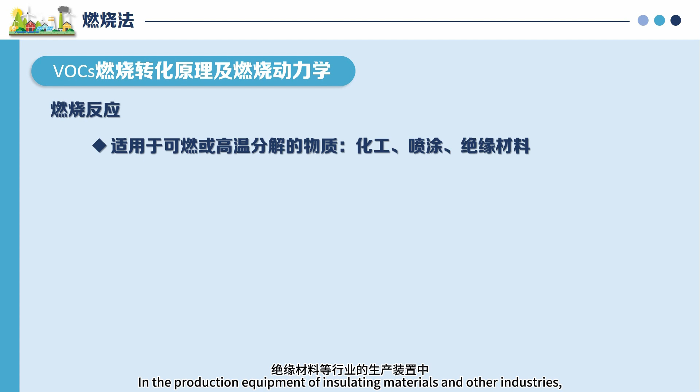Organic waste gas discharged from these processes. Combustion purification is widely used. It can be used to eliminate stench, and while unable to recover useful substances, the heat can be recovered.

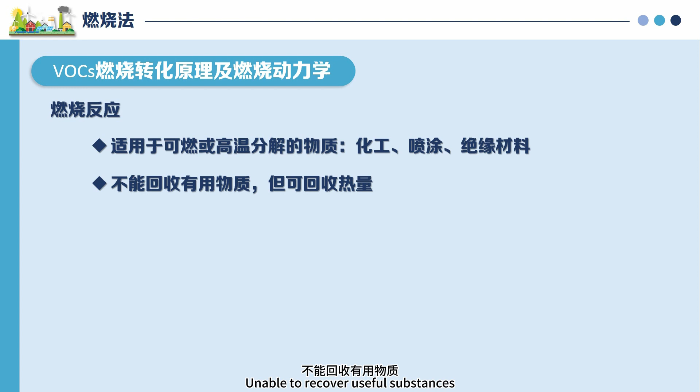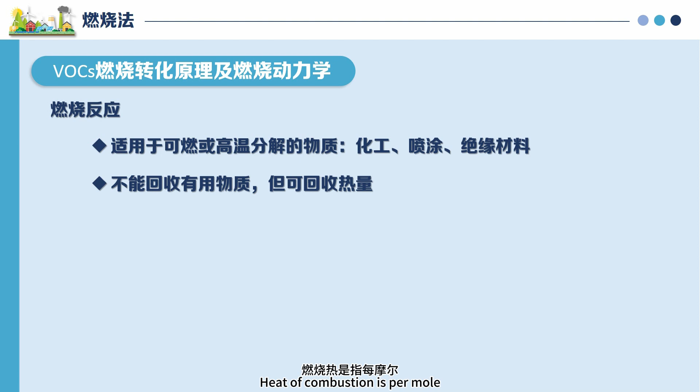First, VOC combustion conversion principle and combustion kinetics. Let's look at the combustion reaction together. As shown below, heat of combustion is the heat released per mole when fuel is burned, in kilojoules per mole. The combustion chemical reaction equation is used to carry out material balance and heat balance calculations, and serves as the basis for designing combustion devices.

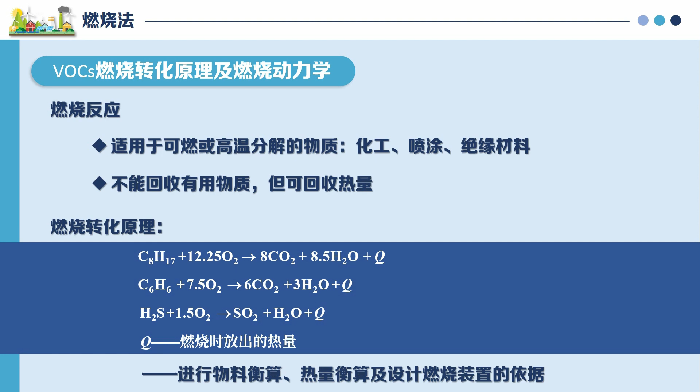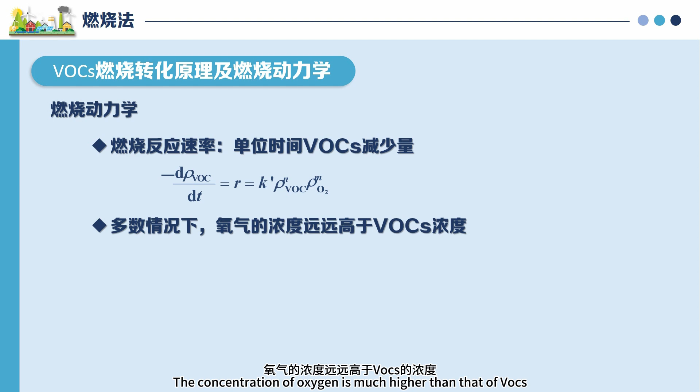Second, combustion dynamics: the reaction rate and unit time concentration reduction of VOC combustion can be expressed as the following formula. In most cases, the concentration of oxygen is much higher than that of VOC. It can be expressed as the following formula.

For most chemical reactions, the kinetic rate relationship between constant K and temperature T is expressed by the Arrhenius equation.

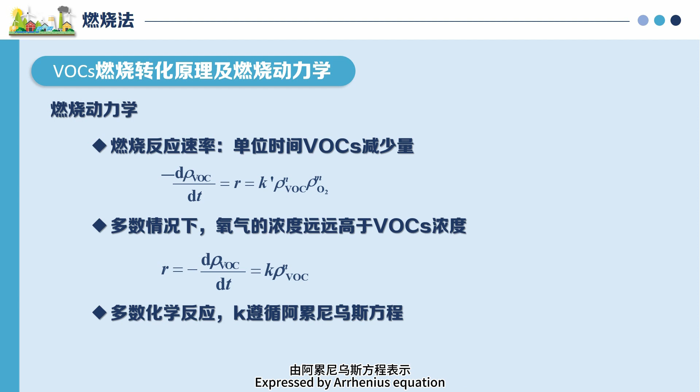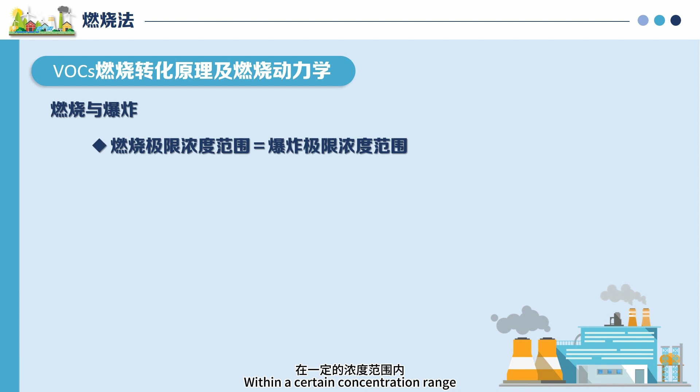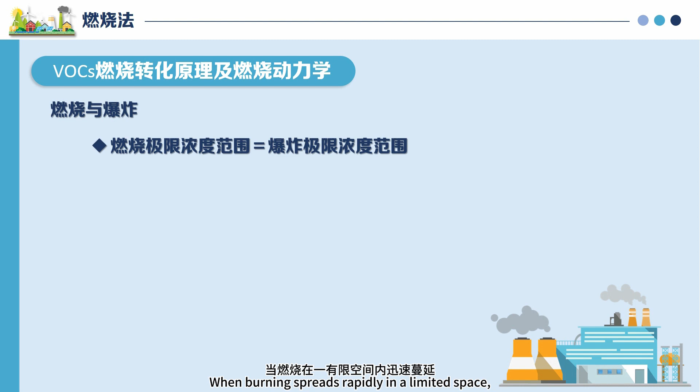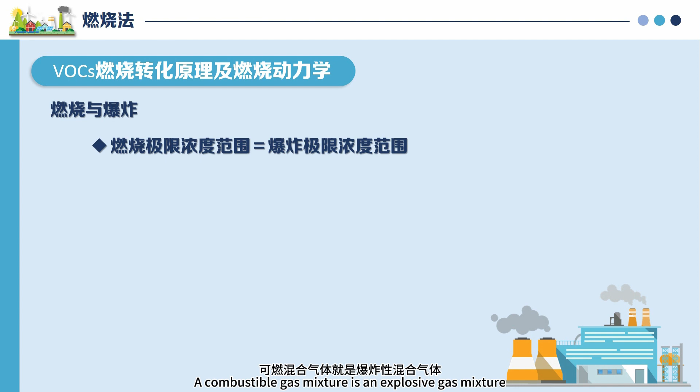First is combustion and explosion. When the oxygen and combustible components contained in the mixed gas are within a certain concentration range, when a point is on fire, heat generated can continue to ignite the surrounding mixed gas. This concentration range is the combustion limit concentration range. When burning spreads rapidly in a limited space, an explosion is formed. So for the mixture, in terms of volume composition concentration, a combustible gas mixture is an explosive gas mixture within the range of combustion limit concentration.

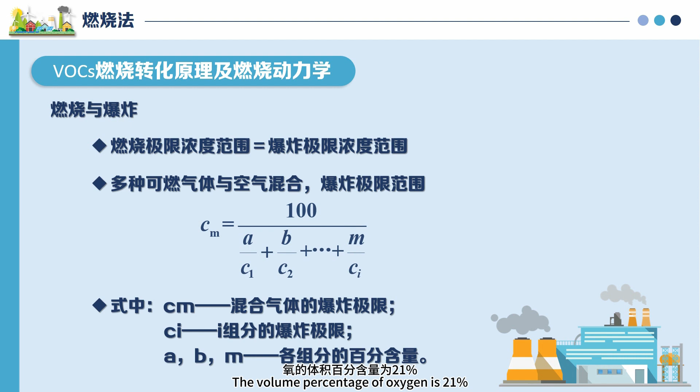That is the explosive limit concentration range. For air, the volume percentage of oxygen is 21%. Therefore, as long as the concentration of combustible components in the air is determined, the limit range has two values: upper limit and lower limit.

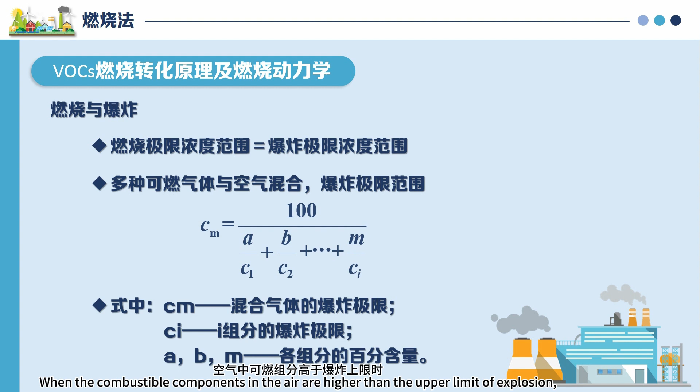When the combustible components in the air are lower than the lower limit, heat generated by combustion is not enough to ignite the ambient mixed gas. Therefore, it can't continue to burn, and won't cause an explosion. When the combustible components in the air are higher than the upper limit of explosion, due to lack of oxygen, it can't cause an explosion.

When a variety of combustibles are mixed with air, the explosion limit range is approximately obtained from the following formula.

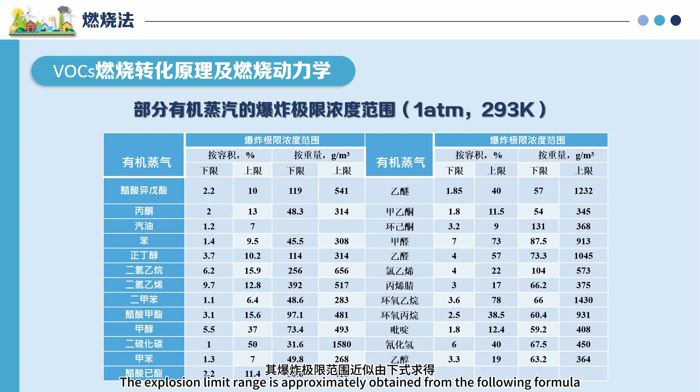Second, combustion process. First, direct combustion, also known as direct flame combustion. It uses combustible and harmful components in the exhaust gas as fuel directly.

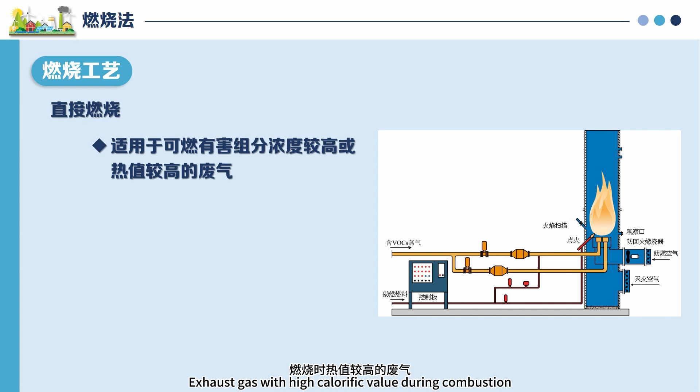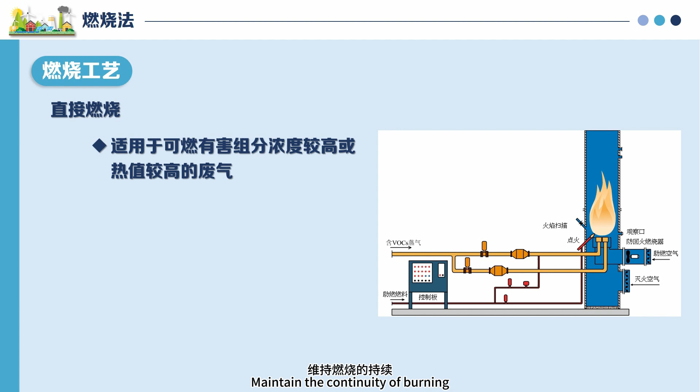Therefore, this method is only suitable for purifying flammable, harmful component exhaust gas with higher concentration, or for purifying harmful components in exhaust gas with high calorific value during combustion, because only the heat released when burning exceeds the heat dissipated into the environment can the temperature of the combustion zone be maintained, sustaining continuity of burning. When multiple combustible gases or a plurality of solvent vapors are mixed in the exhaust gas, as long as the concentration value is suitable, it can also be burned directly.

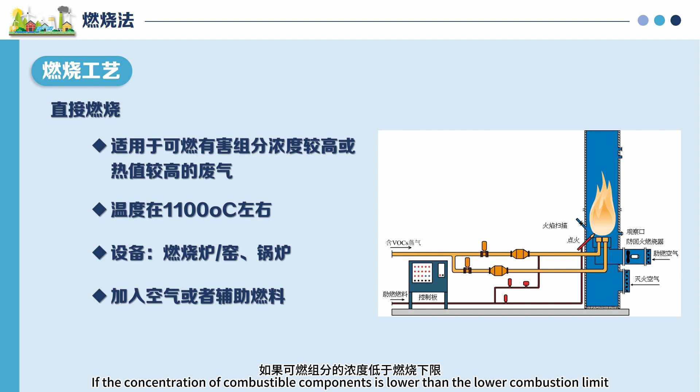If the concentration of combustible components is higher than the upper limit of combustion, it can be mixed with air and burned. If the concentration of combustible components is lower than the lower combustion limit, a certain amount of auxiliary fuel can be added to maintain combustion, such as natural gas.

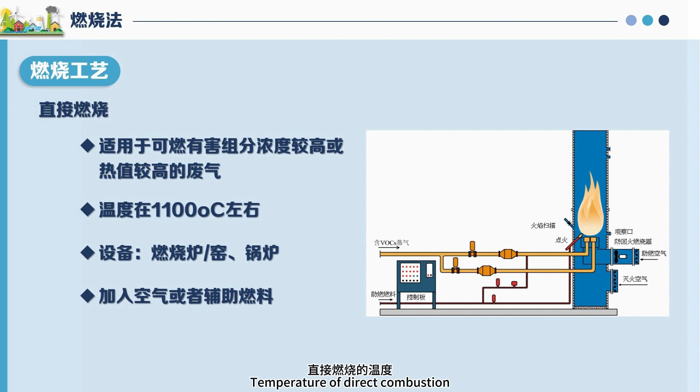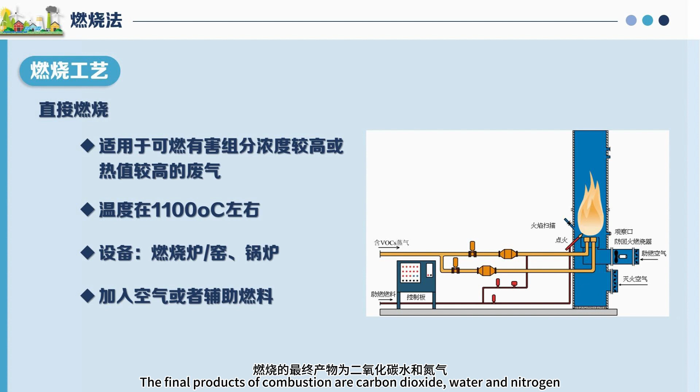Direct combustion equipment includes general combustion furnaces, or the exhaust gas is introduced into the boiler through some device and burned as a fuel. The temperature of direct combustion usually needs to be around 1100 degrees Celsius. The final products of combustion are carbon dioxide, water and nitrogen. Direct combustion method is not suitable for treating low concentration waste gas.

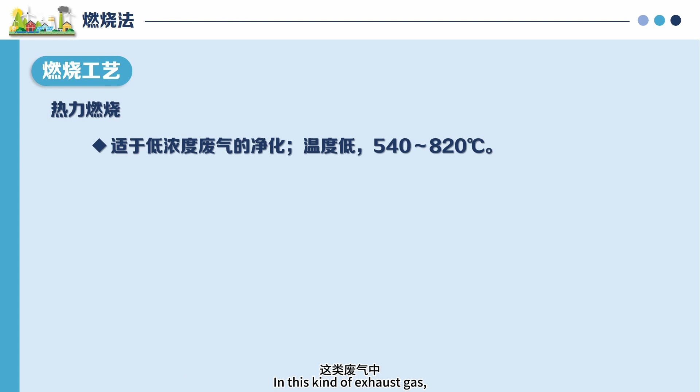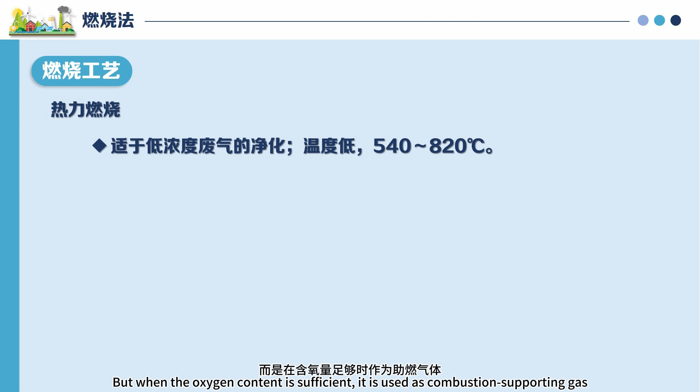Second, thermal combustion, used for purification of waste gas with low combustible organic matter content. In this kind of exhaust gas, the content of combustible organic components is often very low and can't sustain combustion by itself. Therefore, in thermal combustion, the purified waste gas is not used as fuel for combustion, but when the oxygen content is sufficient, it is used as combustion supporting gas. When it does not contain oxygen, it is used as the object of combustion.

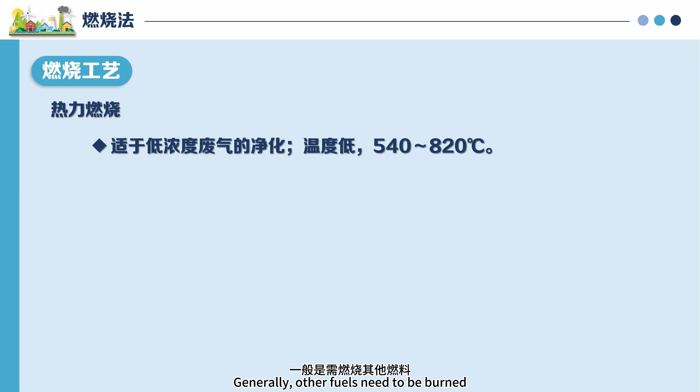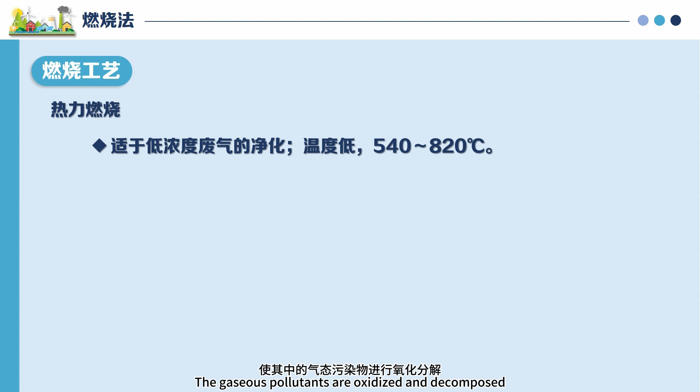When thermal combustion is carried out, generally other fuels need to be burned, such as gas, natural gas, or oil, to raise the exhaust gas temperature to the temperature required for thermal combustion. The gaseous pollutants are then oxidized and decomposed, becoming carbon dioxide, water and nitrogen, etc.

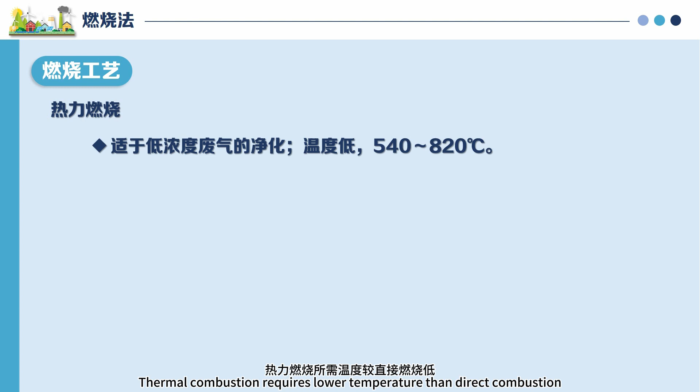Thermal combustion requires lower temperature than direct combustion. It can be carried out at 540 to 820 degrees Celsius.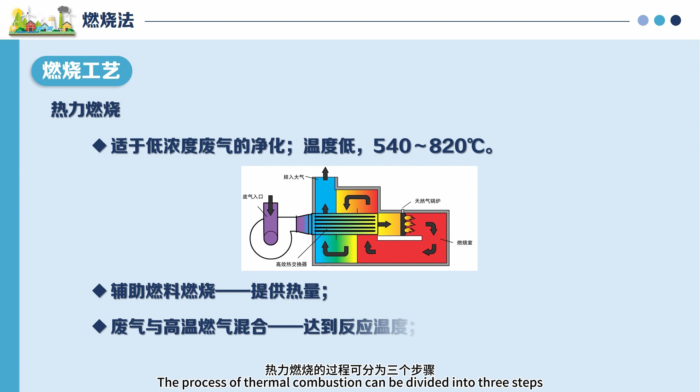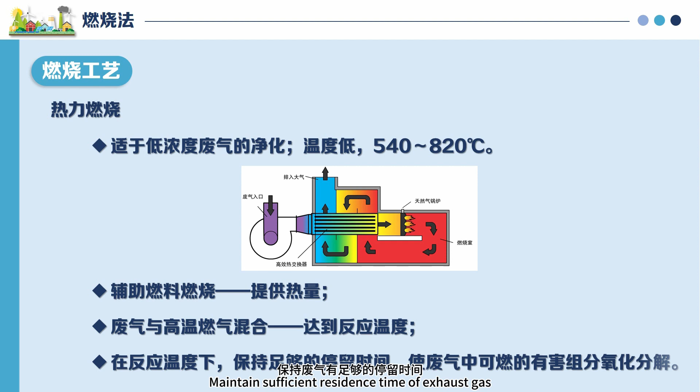The process of thermal combustion can be divided into 3 steps. Auxiliary fuel combustion provides heat. Exhaust gas is mixed with high-temperature gas to reach the reaction temperature. At the reaction temperature, maintain sufficient residence time of exhaust gas. Oxidize and decompose combustible harmful components in waste gas. This achieves the purpose of purifying exhaust gas.

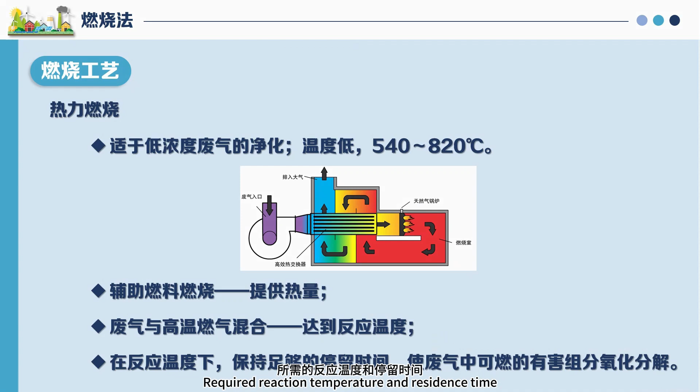Under the condition of sufficient oxygen supply, reaction temperature, residence time, and turbulent mixing, it constitutes a necessary condition for thermal combustion. Different gaseous pollutants, when completely burned in a combustion furnace, require reaction temperature and residence time that are not exactly the same.

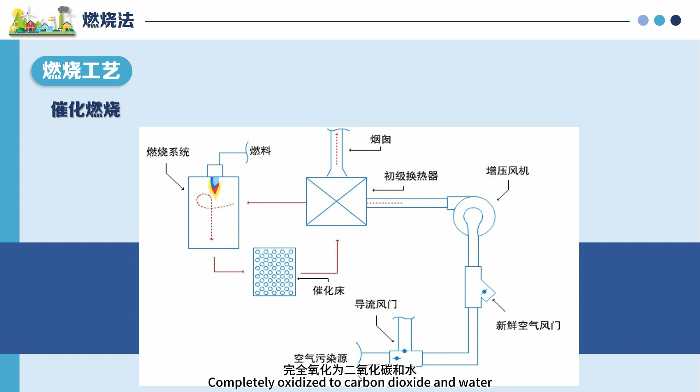Catalytic combustion. Catalytic combustion is actually complete catalytic oxidation, that is, under the action of a catalyst, harmful combustible components in exhaust gas are completely oxidized to carbon dioxide and water. Because most organic compounds are combustible, catalytic combustion method has become one of the effective means of purifying hydrocarbon waste gas.

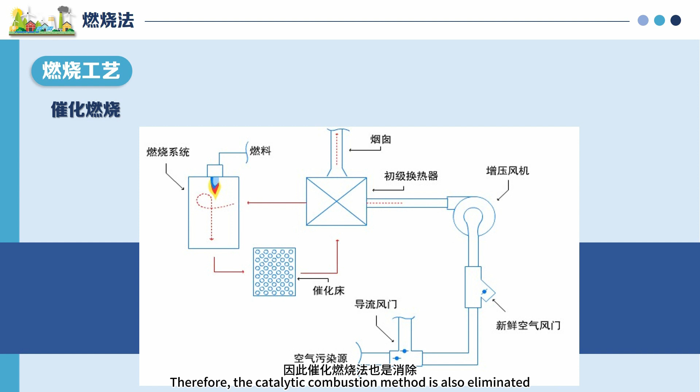And because a large part of organic compounds have different degrees of stench, the catalytic combustion method is also an effective means of eliminating malodorous gases.

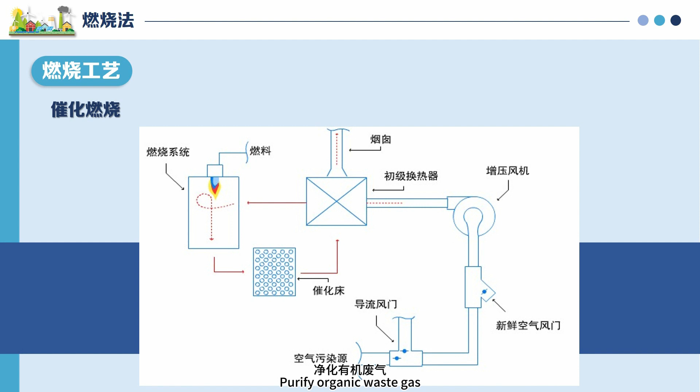Catalytic combustion method has been successfully applied to metal printing, insulating material, coated wire, charring, paint, and chemical industries, among others, to purify organic waste gas, especially in coating wire and in the production process of insulating materials and printing.

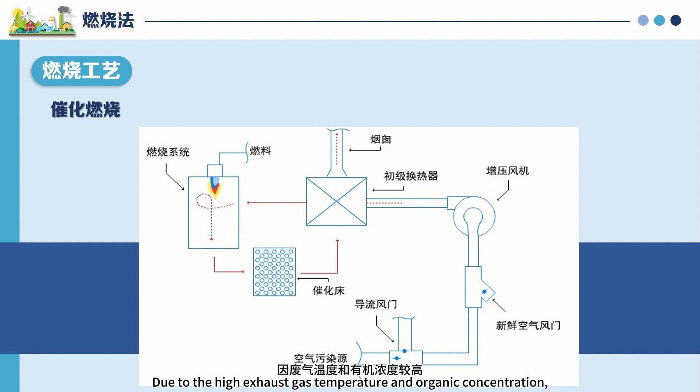Exhaust gas from drying, due to high exhaust gas temperature and organic concentration, is beneficial to combustion reaction and heat recovery. It has good economic benefits. Therefore, it is widely used.

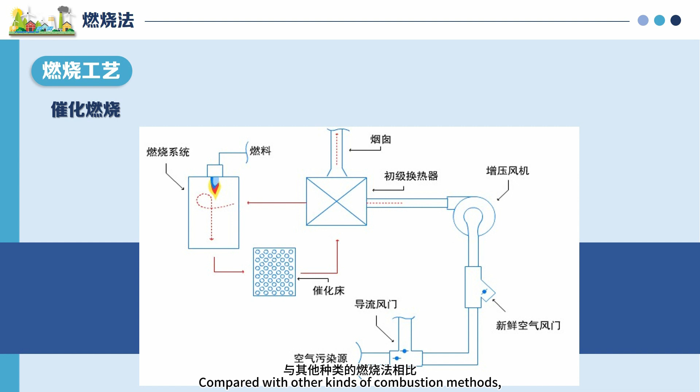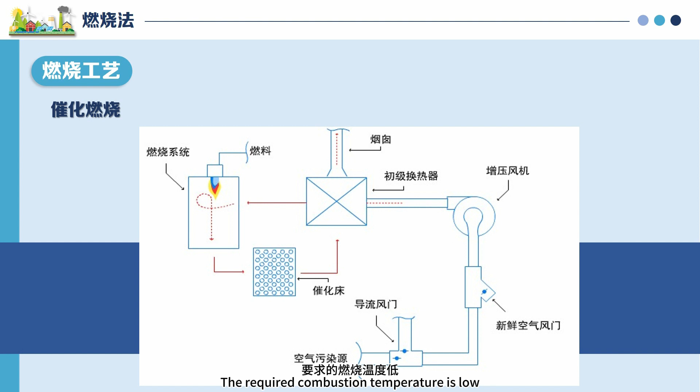Compared with other kinds of combustion methods, catalytic combustion has the following characteristics: catalytic combustion is flameless combustion, with good security. The required combustion temperature is low. Most hydrocarbons and carbon monoxide react between 300 and 450 degrees Celsius.

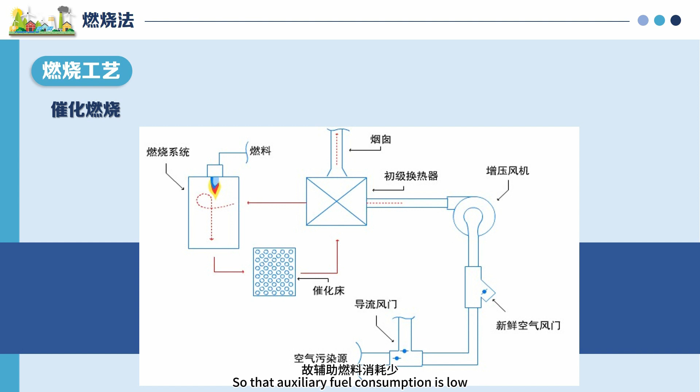The reaction can be completed so that auxiliary fuel consumption is low. The concentration and calorific value of combustible components are less limited.

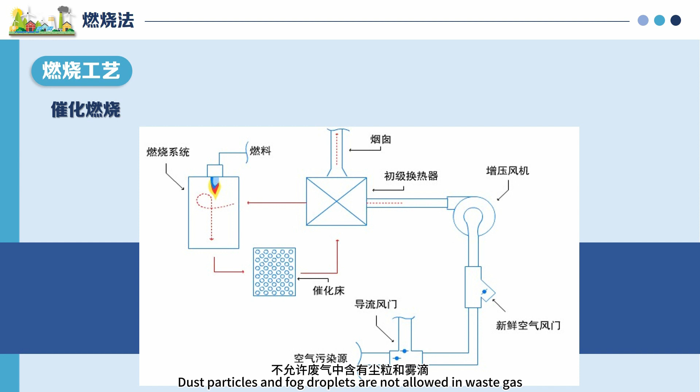In order to prolong the service life of the catalyst, dust particles and fog droplets are not allowed in waste gas.

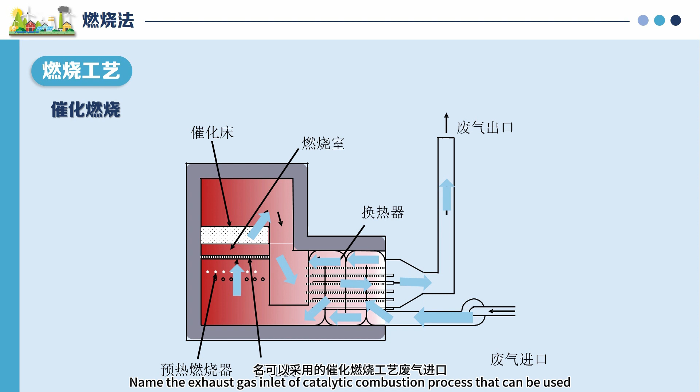For different exhaust gases, name the exhaust gas inlet of catalytic combustion process that can be used. Catalytic combustion process for preheating perforated plate of burner. There are 2 types, divided into split construction type and combined type.

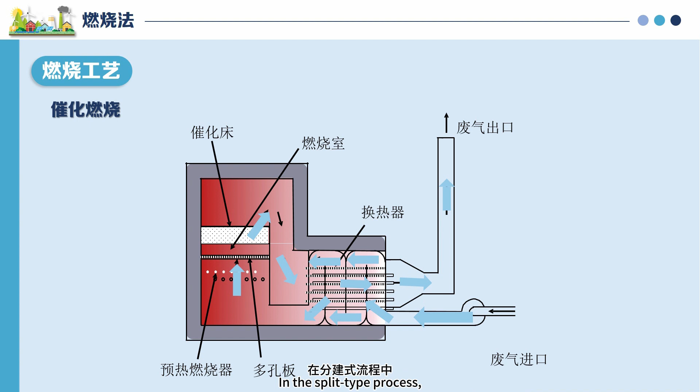In the split type process, preheater, heat exchanger and reactor are all independent equipment, separately established. They are connected by corresponding pipelines. It is generally used to treat occasions with large gas volume.

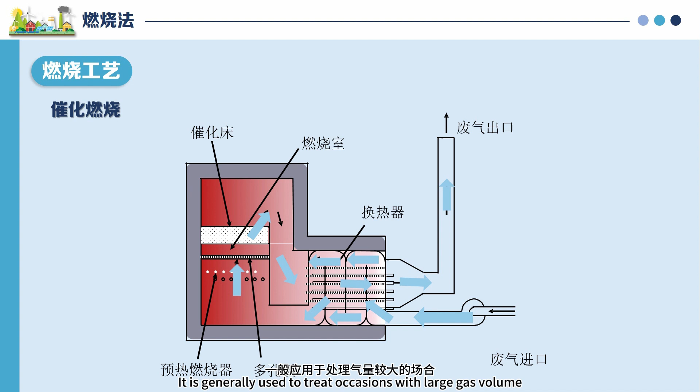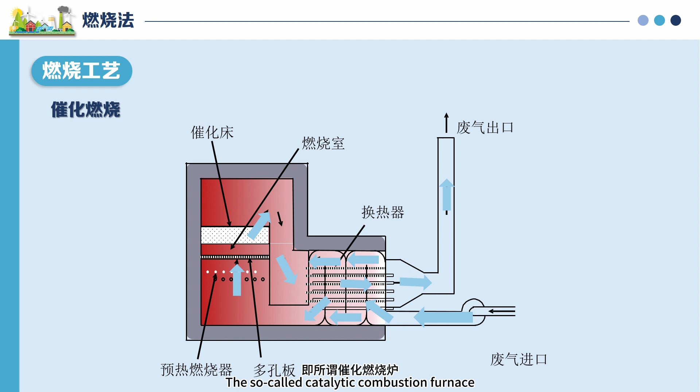Combined process: the parts that will be heated, heat exchanged and reacted are combined in the same device, the so-called catalytic combustion furnace. This is a compact process with small footprint, generally used to treat occasions with small gas volume.

No matter what process form is adopted, the composition of its processes has the following common characteristics. First, the gas entering the catalytic combustion device.

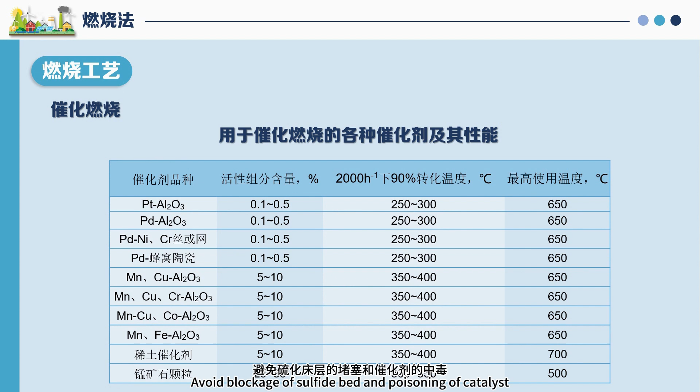First of all, it must be pre-treated to remove dust, droplets and harmful components, to avoid blockage of the catalyst bed and poisoning of the catalyst. Second, the gas entering the catalytic bed.

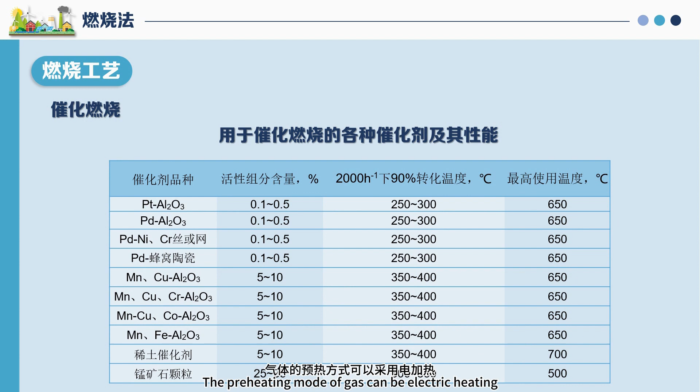The light-off temperature of the catalyst used must be reached before catalytic reaction can be carried out. Therefore, for intake air below the light-off temperature, it must be preheated so that it reaches the light-off temperature. The preheating mode of gas can be electric heating or flue gas heating. At present, electric heating is widely used.

Catalytic combustion reaction releases a lot of reaction heat. The temperature of combustion tail gas is higher. This part of heat must be recovered.

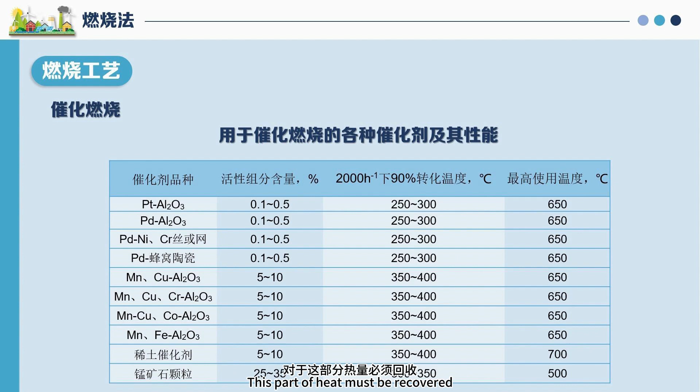Finally, the comparison of combustion process performance. Direct combustion method is suitable for treating VOC waste gas with high concentration, with a generally destruction rate above 95%. Although the operation cost of direct combustion method is low, due to the high combustion temperature, it is easy to cause explosion during combustion, and waste heat energy generates secondary pollution. Therefore, it is rarely used at present.

Thermal combustion method recovers heat energy through a heat exchanger, with lower combustion temperature. But when the concentration of VOC is low, auxiliary fuel needs to be added to maintain a normal combustion temperature, thereby increasing the operating cost.

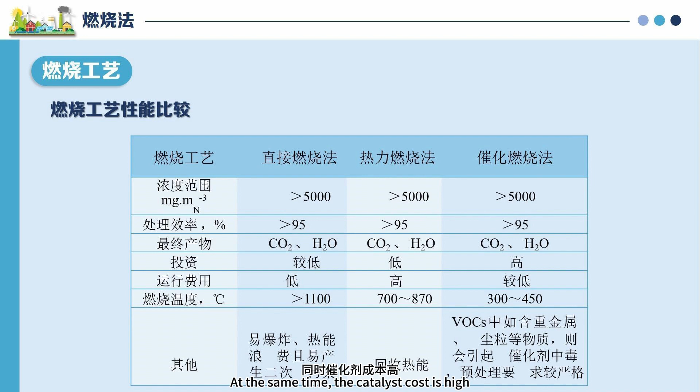Catalytic combustion method, due to the adoption of heat exchange preheater, catalyst and other measures, has significantly reduced combustion temperature so that combustion cost is reduced. However, because the catalyst is easily poisoned, the requirements for intake air components are extremely strict. It must not contain heavy metals, dust particles and other substances that easily cause catalyst poisoning. At the same time, the catalyst cost is high, so the treatment cost of this method is high.

Students, through the study of this section, should basically understand the principle of controlling VOC pollution by combustion method and its technological process. That's all for our class today. Thank you all.